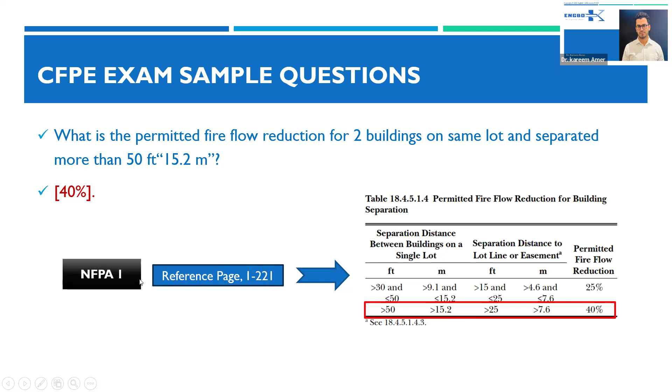So based on the question here, 2 buildings on the same lot, you can find it here in the first column. Separation distance more than 50 feet, so you get the reduction. It's here around 40%. This is the code. This is the reference page.

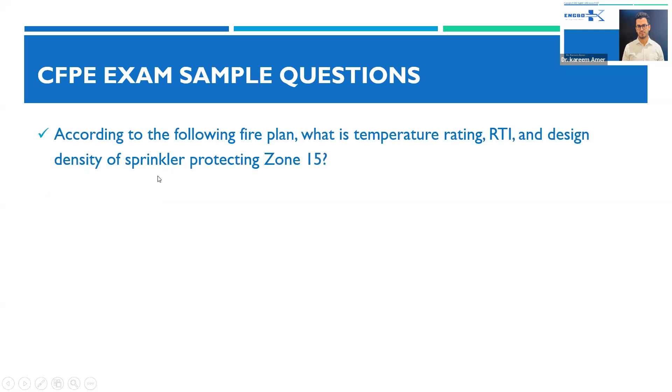For the question here, according to the following fire plan, as per NFPA 13 and your competency and skills in fire plans review. As per these drawings, what is the temperature rating, the response time index, and the design density of the sprinkler protecting zone number 15? So here, as per zone number 15, you can find it here. This type of sprinkler, as per this legend, you can find it here. It's pendant type, ELO, extra large orifice. So here it's quick response, QR, K factor 11.2, and temperature rating 74 Celsius.

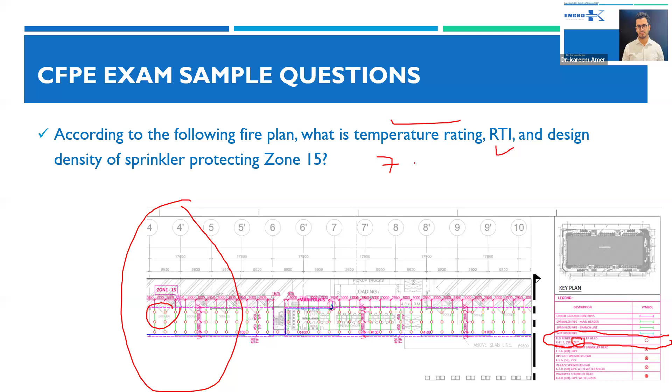So here we answered temperature rating and RTI, quick response, temperature rating 74 Celsius. Design density: normally in the exam, they will give you some design criteria or notes for these sprinklers. One of these notes or design criteria will give you the design density. For example, here it will be 0.20 GPM per square foot.

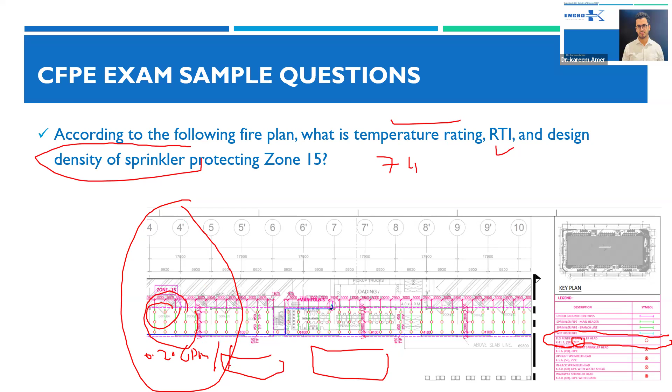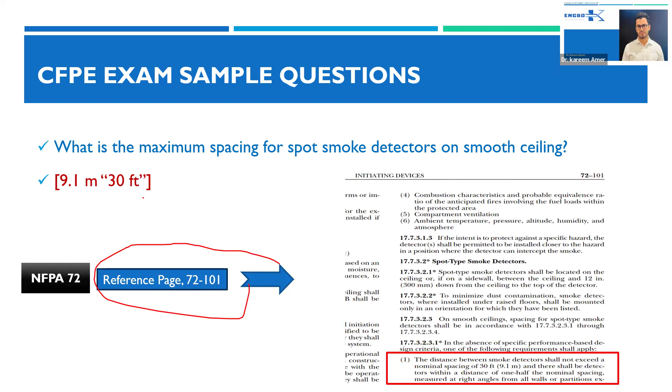Here, what is the maximum spacing for spot smoke detectors on a smooth ceiling? So as per NFPA 72, you can find the information in these sections here, reference 72-101. Normally it's a maximum distance of 9.1 meters or 30 feet.

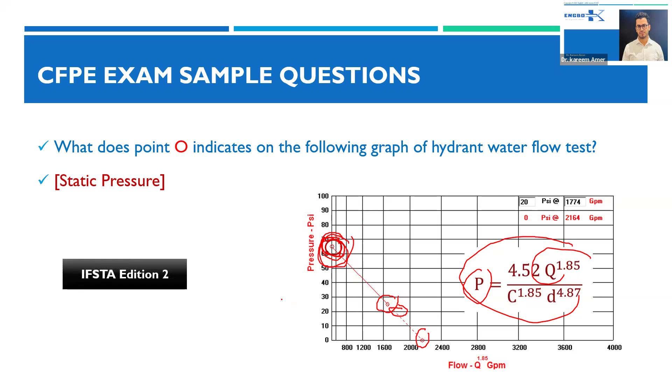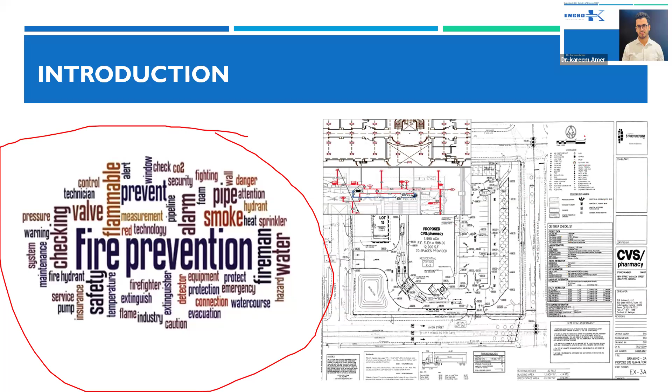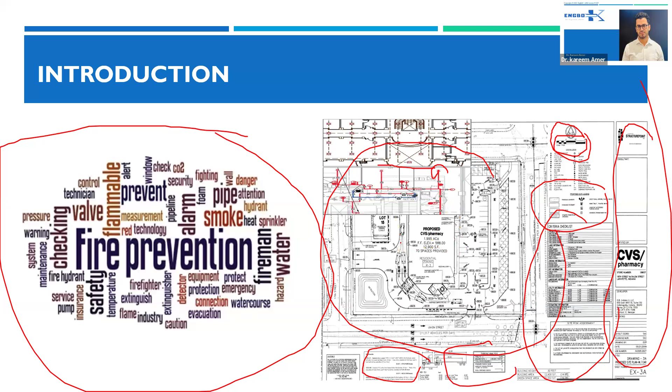Here you have to know those directionals, architect scale, title block, legend and symbols, schedules, notes, design criteria, the plan itself, architecture, structure, MEP, sprinkler drawing, fire alarm drawing, how you find the pipe sizing, distance between sprinklers, distance from the wall, distance between smoke detectors, what is the fire rating for the barriers, for the walls, for the column, travel distance, dead end corridor, and so on.

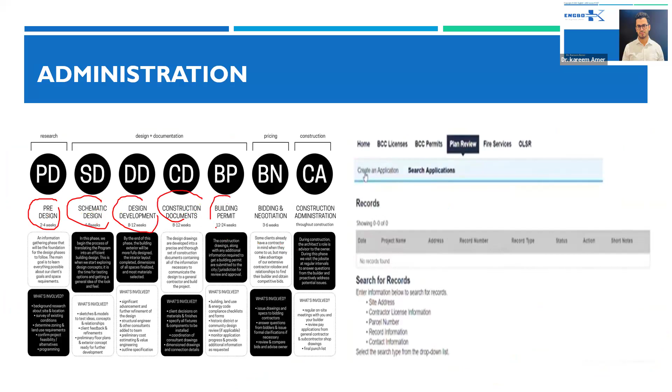For administration, how you know the different design process, starting from pre-design, schematic design, design development, construction documents, building permits, bidding and construction administration, and what we are doing in each stage, how we submit for building permits through the portal of civil defense or authority having jurisdiction in your country.

Day number 2 is about general knowledge and practice. We'll take in detail here the code and standard, performance-based code, prescriptive codes, code amendments, NFPA 1, 101, 72, 13 and IFSTA, communication with stakeholders, AHJ review, permits, and certificate of occupancy.

So here we have to know what is the difference between code and standards and ordinance. What is performance-based design and prescriptive codes? What does NFPA 1 focus on? 101, 72 and 13 and so on. Then how you communicate and submit for building permit through the AHJ, how you review,

how you deal with boards of appeals, and if there is any legal proceeding, either administrative or judicial, how you can give testimony in the court if there is any judicial proceeding. And here's the process of building permit submission till you get the CO and the building is ready for occupancy.

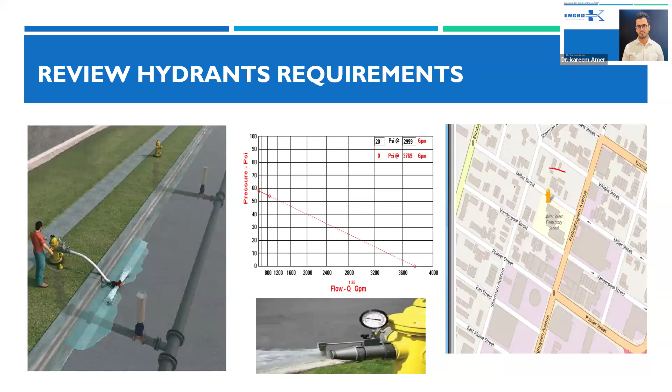Here, different hydrant tests, residual and static, flow hydrant and test hydrant. Here's a flow test graph with a tube for measuring pressure, location of hydrants on the drawing, vehicle access minimum width for the roadway. Normally you have 20, 24, and 13 feet height. Turnarounds and dead end. Here we have obstruction of minimum clear height.

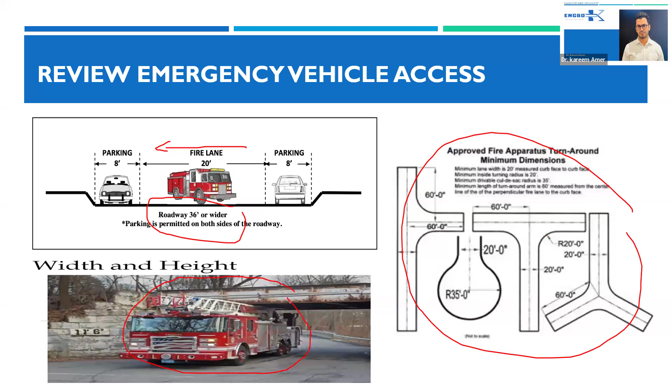Day 4, about building plan review, covers the major questions, 35%, because here we are discussing all types of drawing, architecture, structure, MEP, sprinkler, standpipe, detection, life safety, and so on. We talk first about occupancy classification, how you classify the building based on hazard, light, ordinary, extra, type of occupancy, educational, assembly, business, high-rise building, and so on.

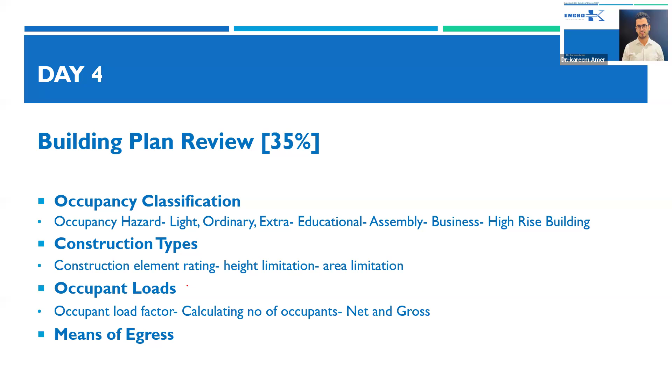Construction types based on the elements, wall, floor, ceiling, element rating, height limitation for the building, area limitation, and the flow requirements. Occupant load factors, calculation of occupant numbers, net or gross. Means of egress, exit arrangement, remoteness, travel distance, common path, dead end, corridor, interior finish, stair or ramp details.

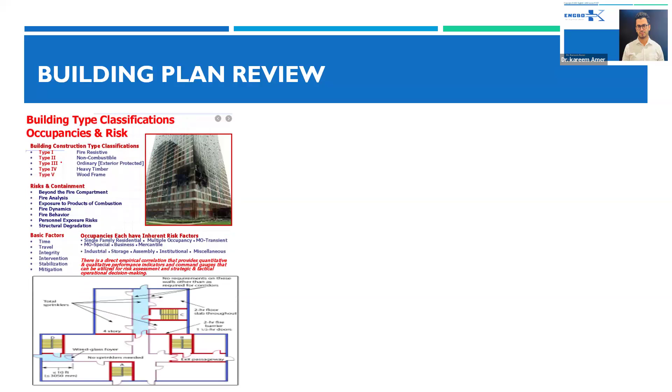Here we have occupancy classification, construction types, fire rating for the barriers, wall, floors, how you calculate occupant load based on occupant load factors, based on use or occupancy, means of egress, exit access, exit and exit discharge, remoteness or exit arrangement, either half or third of the building diagonal.

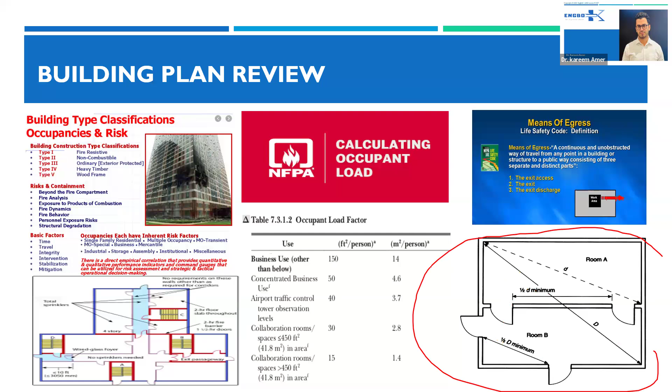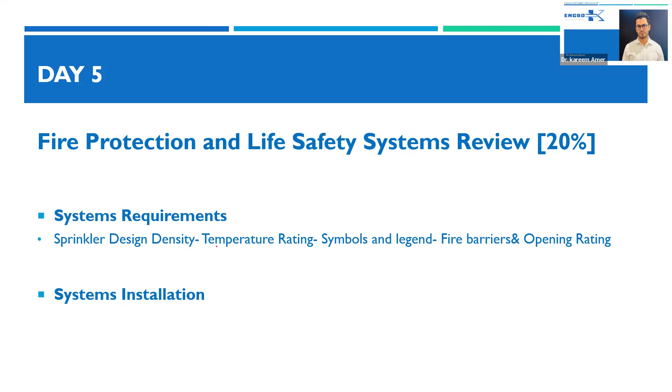Last day is about fire protection and life safety systems review. It covers 20% of exam questions. Normally it's about systems like sprinkler, smoke detection, life safety, sprinkler design density, temperature rating, symbols, legend and drawing, fire barriers and opening rating, detector spacing, sizing, notification appliances either audible or visible, type of sprinkler heads, schedule, and so on.

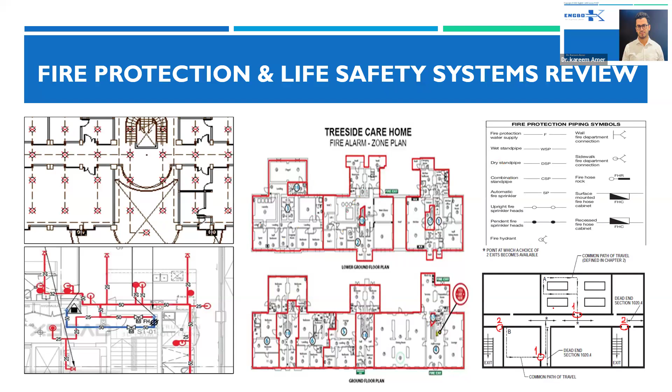So here, how you review the drawing of sprinkler system, different type of heads, pendant, upright, sidewall, different type of sprinklers based on installation, and here spacing between sprinklers or between wall and sprinklers. Here detection and fire alarm systems. Here symbols and legends. Here the travel distance, common path, and dead end.

So what is the outcome or benefit of this course and certification? First, as we mentioned, it's a board recognized certification, recognition as an expert by your colleagues, greater confidence in your abilities, improved job performance, career advancement opportunities, and it's an accredited CPD certificate. So you get all these benefits from the course.

Plus, you will meet NFPA 1031 for the qualification of fire inspector and fire plan examiner, which is the most important and highly required by employers, either government or private sectors, when they hire fire plan examiner or deputy fire marshal or chief engineer or fire protection engineer or inspectors and plan examiners, either in the States or basically in the Gulf area.